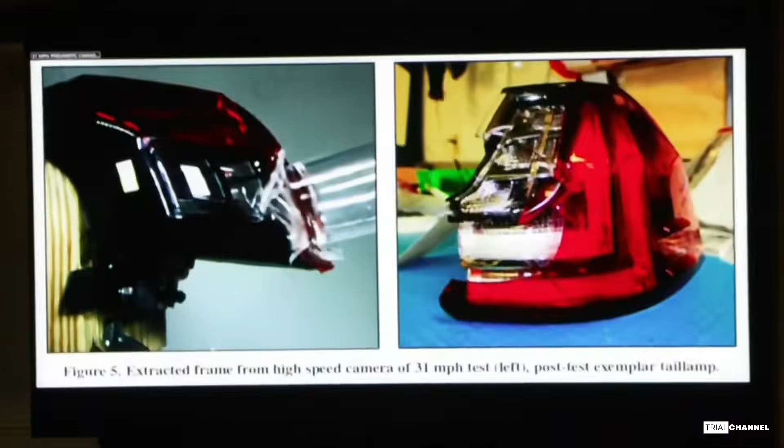Is this the photograph that was just marked as exhibit 213 that's in front of you? Yes. Can you explain to the jurors what they're looking at? So on the left part, you are looking at a frame from the high-speed video just after the contact with the taillight. On the right, you're looking at the post-damage to the taillight after the glass had been fired into it. And if we could look at the next exhibit with the court's permission.

Okay. And what are we looking at here? Same thing on the left. Again, this is the 37 mile an hour test. The glass striking just in the area where the bottom of the turn signal indicator is, so right where it meets the red portion of the lens and the clear portion of the lens, that's about where the impact point was.

You could see that a large portion of the outer red assembly, lens cover is missing and fractured. The clear portion of the outer lens to the turn signal indicator is also fractured, as well as the underlying clear diffusers in that assembly.

Would your testing in both of these scenarios, the 31-mile-an-hour test and the 37-mile-an-hour test, represent an accepted methodology for controlling for aim, velocity, impact site, and those issues, if you will, as it relates to testing of this sort? Yes, we were able to control those variables. And is that an accepted methodology in the area or the field of accident reconstruction?

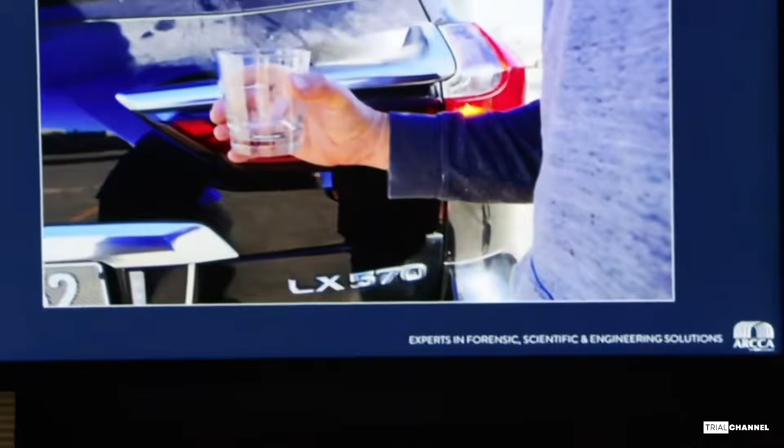Slide number 2, please. Based on your review of Dr. Welcher's reports and his data, what testing did Dr. Welcher undertake or conduct? So he did, initially it appeared that he did a static test, if you will, just demonstrating holding his right arm out adjacent to the rear taillights on the right side of an exemplar Lexus to demonstrate his theory of how the arm contacted the taillight.

What is a static test? I'm sustaining that. Ask it differently, Mr. Jackson. I'm going to strike that. What testing did you note that Dr. Welcher did with regard to this particular photograph? What is a static test? Well, in a static test, neither the arm or the vehicle is moving. It's just him aligning his right arm adjacent to show how his arm aligns to the geometry and the dimensions of the Lexus.

Did Dr. Welcher appear to be wearing similar clothing as John O'Keefe was wearing on January 29th, 2022? Yes. Was there any significance or purpose for that, in your opinion? In this test, no.

Did you identify any limitations with regard to this sort of testing undertaken by Dr. Welcher? Well, it's very basic in that the only thing that this demonstrates is that you can get your right arm to align with the taillight. Beyond that, it doesn't tell you anything with respect to what happens to the arm when it makes contact with the taillight. What's the motion of the arm? What's the damage to the taillight? What's the acceleration of the arm? What's the forces of the arm? So it doesn't answer any of those other questions. The only question it answers is, does the arm align with the taillight?

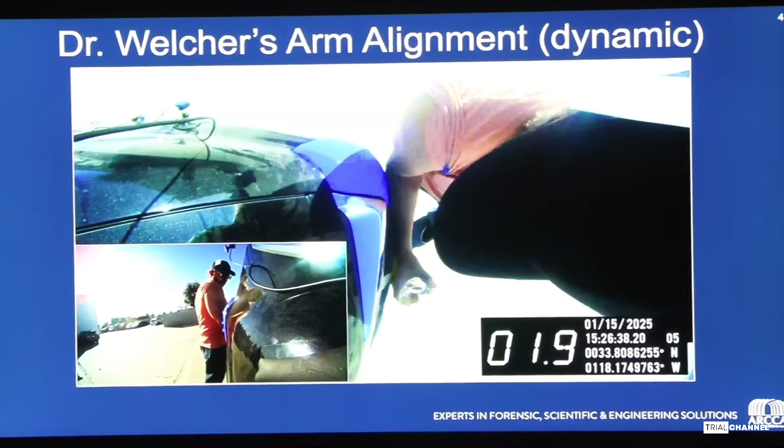Did you note any shortcomings with this particular test? Well, much like the static test, again, it leaves the door open to all those questions about doing this at 2 miles an hour. That doesn't tell you anything about what happens at 10, 15, or 20 miles an hour. What are the collision forces? What's the damage? How does the arm move? What would the expected injuries be? This dynamic test, as well as the static test, doesn't answer any of those questions for us.

Is this test from Dr. Welcher considered a force calculation? I'm not aware of him making any type of force calculations or measuring accelerations or anything of that nature, no.

Did Dr. Welcher conduct any testing to determine whether the damage to Miss Reed's Lexus was consistent with the striking of an arm of a pedestrian? I'm not aware of any impact testing that he did, no.

Did Dr. Welcher conduct any testing to determine the forces necessary to cause the damage to the taillight of Miss Reed's vehicle? Not that I'm aware of, no.

Did Dr. Welcher conduct any testing to determine the forces necessary to cause the injuries to John O'Keefe's arm? No, not that I'm aware of.

Did Dr. Welcher provide any opinions as it relates to the speed of the subject Lexus at the time of the alleged incident? No, from reviewing his report and his PowerPoint and analysis, I could not find anywhere in it a specified speed or even a range of speeds.

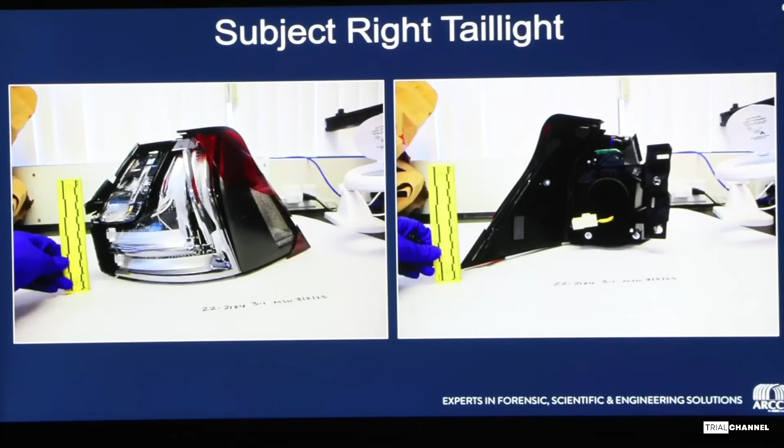Well, I'm going to jump to the next slide. So now the taillight has been removed from the vehicle. What's important here is looking at what damage we have to this taillight, what components were damaged in this alleged interaction. We're looking at the clear diffuser at the bottom, which is fractured and missing, same with the ones on the vertical side. The majority of the outer red lens is also missing and fractured. And on the back side, we also have some fracturing to that black plastic, and there's a chunk of plastic missing on the top portion of the taillight as well.

I want to ask you a couple of questions about that diffuser. If you could focus your attention on this area. Describe for the jurors what they're looking at in terms of the diffuser. What is the diffuser? Right, let me see if this...

So the diffusers, right where my mouse is, there's a clear diffuser that runs along the bottom, and then there's another diffuser that runs along here, and then it also goes up vertically. Same here on the bottom one, that also goes up vertically. So this piece was missing and fractured on the bottom, along with the vertical portion. The chrome piece here is also fractured and damaged, and then the second tier, that clear diffuser, was also fractured and broken on the upper section as well.

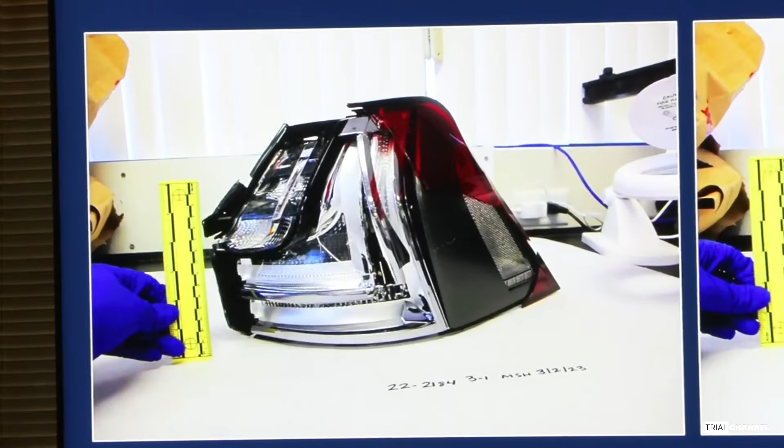Was that of significance to you in your review of the damage to the taillight? Yes. Why? Well, because that tells me that we have to have enough force and energy to break that 5 millimeter thick red outer lens we talked about earlier. We have to have enough force to get beyond that to now start penetrating into the interior components of the taillight to get to those clear diffusers and cause damage induced out the back end of the taillight as well.

May I have just a moment more? Yes.

Dr. Wolfe, did you bring with you an undamaged taillight exemplar? Yes, it's up here with me.

Describe what it is that you brought with you. I brought a two-part assembly. I 3D printed a bracket so that I could mount the liftgate taillight assembly as well as the quarter panel taillight assembly. These are undamaged, in manufacturing specs, correct? Correct, yes.

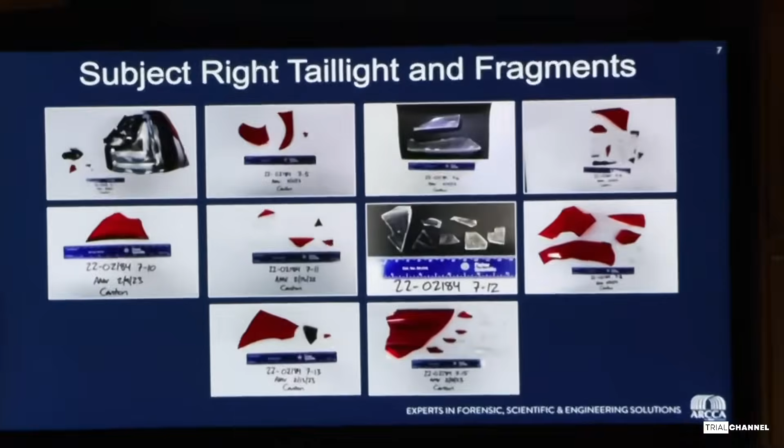What are we looking at here? This is a collection of photographs depicting various fragments from the right rear tail lamp assembly of the Lexus. I'll note there are a few glass fragments in this photograph, which, as discussed earlier, did not originate from the taillight assembly since there's no glass in it. But altogether, from what I recall, there were about 50 fragments counted, maybe a little less, from the right taillight.

If we could go to the next slide, please. What are we looking at here? These are photographs depicting the sweatshirt or hoodie that Mr. John O'Keefe was wearing on the night of the alleged incident. And what was the role that this played in your analysis ultimately?

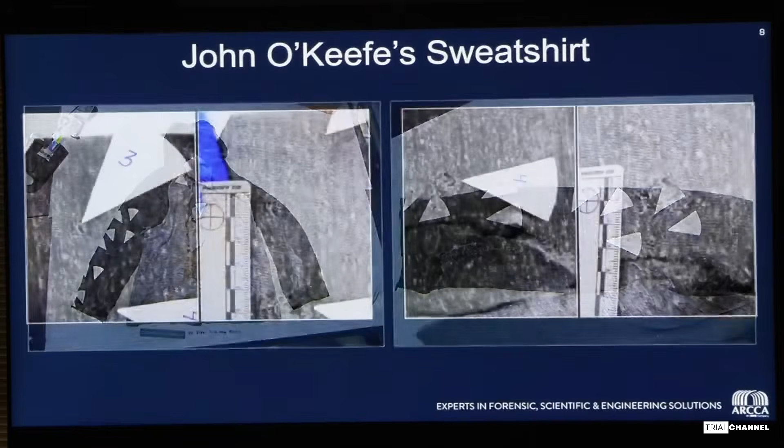Well, one of the things I noted, if we go to the next slide, is there were a series of small punctures or holes in the right sleeve of the sweatshirt, varying in size, some as small as just a few millimeters. I believe there were maybe 10 or 12 on the right sleeve.

If we could go back to the larger photo, do you see the right sleeve denoted on the photograph to the right? Yes. What was the significance of the triangular arrows or markers? I believe those were to annotate or draw attention to those holes, the defects in the right sleeve. Can you count those for us? On the photograph on the right, I believe I see a total of 9. And on the photograph on the left, just the right sleeve area? 9 as well.

If we can go to the next slide. What are the arrows pointing to in these photographs? This is basically the previous shot, but close-ups of some of those evidence markers. You indicated some of the sizes - what were some of the smaller sizes of those holes? From what I recall, around 3 to 5 millimeters for some of the smaller ones. How big is 3 millimeters in inches? Probably around an eighth of an inch or so.

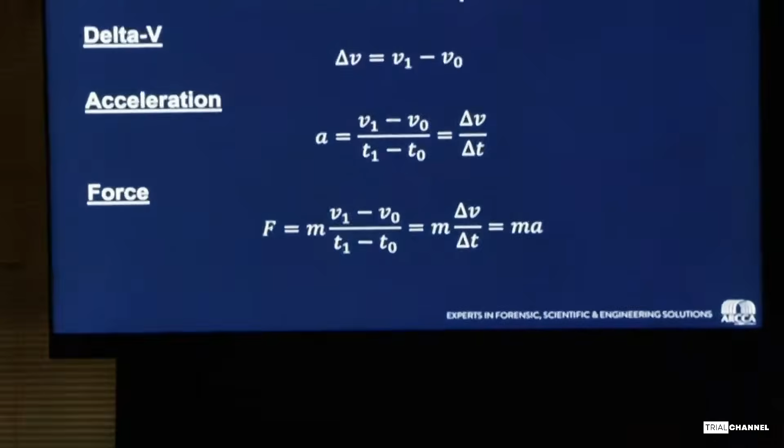So that first one, delta V. What do I mean by that? That simply means you could think of delta as change in. So change in velocity. If you look at that equation, the change in velocity is really simple. If I've got an object that's initially at rest, V naught is 0 miles per hour, I hit it and it's now moving 10 miles per hour, that means it underwent a change in speed of 10 miles an hour and is moving at that velocity.

Acceleration is essentially how quickly did that velocity change occur. Did it go from 0 to 10 miles an hour in a split second, or did it happen over a few seconds? Depending on the timing of how quickly that change in velocity occurred will determine what the acceleration is. And as I've already mentioned with Newton's second law, we can take that acceleration information and apply it, if we have a known mass, to calculate the force on that object.

How did these math equations, delta V, acceleration, force, play into the accident reconstruction in this case? Well, they're extremely fundamental, and I think as we go through the PowerPoint you'll have an appreciation and understanding of what these concepts are.

You'll see that I've plotted graphs with acceleration that show the rate of change in speed over time. You'll see graphs of delta V, the change in speed of the arm as it's being impacted by the taillight. And then ultimately we can calculate the force of that impact to assess whether or not there's a mechanism for the injuries, which my colleague Dr. Wolfe will discuss.

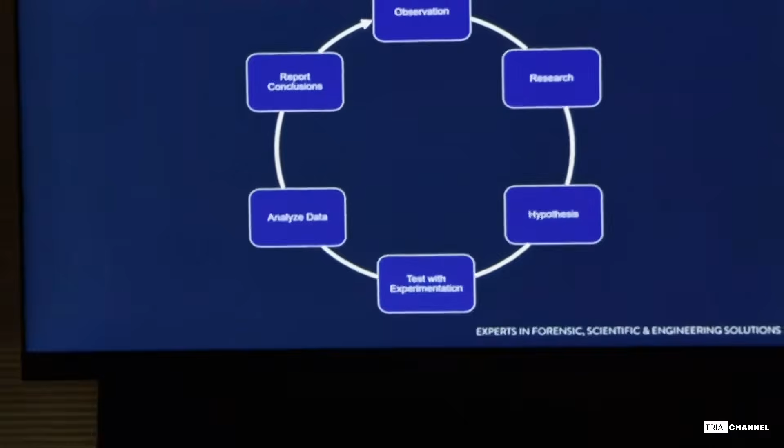What are we looking at here? Scientific method. What does that mean? So the scientific method is a process that scientists typically use to be able to reach conclusions. And so you can think about it in this case, we make an observation, right? We have injuries to the arm. We've got a damaged taillight. So let's try to do some research to figure out, has anyone done testing with that? Has anyone hit an arm with a taillight, see what happens, see what the forces are?

And then we start to make a hypothesis, right? It's kind of an if-then statement. If the arm contacts the taillight, does the taillight break? Does it not break? What's the hypothesis there? And at least my understanding of reviewing Dr. Welcher's work, it appeared to be that his hypothesis... Sustained. Next question. Sure. Let me ask a different question.

Going back to the calculations previously, the delta V, the acceleration, the force calculations that you described to the jury, did you see anywhere in any of Dr. Welcher's reports or his data that he undertook those core calculations? No. With regard to the scientific method, did you see whether or not Dr. Welcher followed this scientific method as you're explaining it to the jury?

Sustained. What opinions or conclusions did you come to about the scientific method, if any, that Dr. Welcher did or did not undertake? Sustained. Did you review Dr. Welcher's entire database? In other words, all the reports, all the raw data, and his PowerPoint? Yes. Did he undertake the scientific method as you know it? Right, so that's sustained.

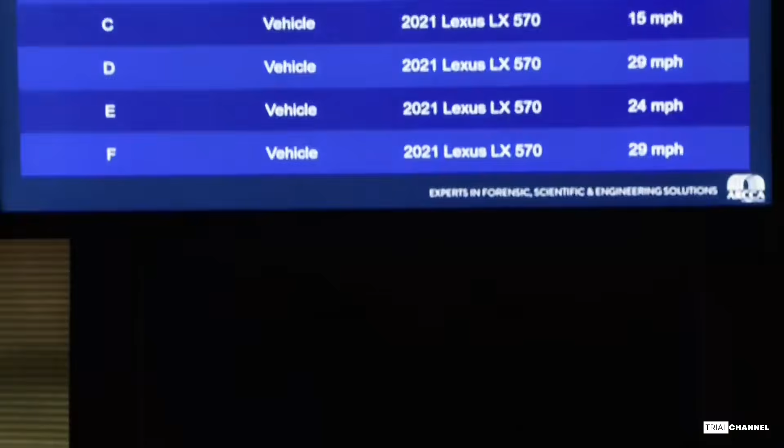Let's move on to the next slide. Did you actually undertake testing in furtherance of the scientific method? Yes. Let's move on to the next slide and you can describe what we're talking about. What are we looking at here? So you're looking at a test matrix of the various tests that we conducted at ARCCA. I could go through them one by one if you want. Let me ask you foundationally, was your testing directed toward determining whether or not the scenario proposed in Dr. Welcher's report was consistent or inconsistent with what you would find, ultimately? The objection sustained. Was your testing specifically designed to determine whether the damage to Miss Reed's vehicle, her Lexus, was consistent with the scenario that was proposed by Dr. Welcher? Yes. That's sustained too. Ask it differently, Mr. Jackson.

What was your testing? What were you trying to find out? Well, again, we talked about earlier about that hypothesis, right? My understanding, Dr. Welcher indicated that the arm contacted the taillight, but there was no analysis or testing to determine what's the expected outcome of that. What's the damage to the taillight? So you answered the first question. I'm striking that second part. Ask another question. Was there anything else? Simply put, it's to find out what happens when you impact an arm with a Lexus taillight at various speeds. What happens? What was your understanding of Dr. Welcher's hypothesis? That's sustained. Did you have an understanding of Dr. Welcher's hypothesis? That's sustained too.

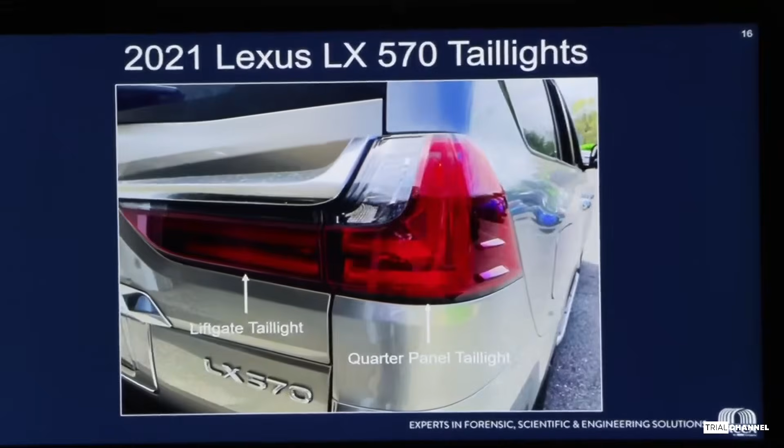And ultimately, what testing did you undertake specifically as it relates to this particular vehicle? We did full-scale vehicle testing with the vehicle driving into an ATD arm, as well as an ATD arm attached to a dummy, and then a full-on impact to a test dummy. Did you assess the damage to the right tail light after these various tests? Yes, after all of the tests. Did you assess the acceleration and quantify the forces that were involved? Yes. Did you assess the material and textile damage to the clothed ATD? Yes. Ultimately, did you conduct lab tests in an effort to answer some of these questions as well? Yes.

And you've already mentioned this, but you utilized in your testing the exemplar vehicle to the fullest extent that you felt necessary? Absolutely, yes. Were you hampered or hindered in any way in terms of damaging the vehicle or utilizing the vehicle in any way that you wished? No. Let's go to the next slide, please.

What are tests A and B? What are those laboratory tests? So these were the initial two tests that we did to get an idea of starting to test this hypothesis. As I mentioned, we weren't sure at 10 miles an hour what would happen to the taillight. We wanted to see what would happen at 17 miles an hour with the arm. So again, it was to evaluate from a starting point what happens in this interaction based upon how Dr. Welcher had his arm oriented in his PowerPoint and analysis. Next slide, please.

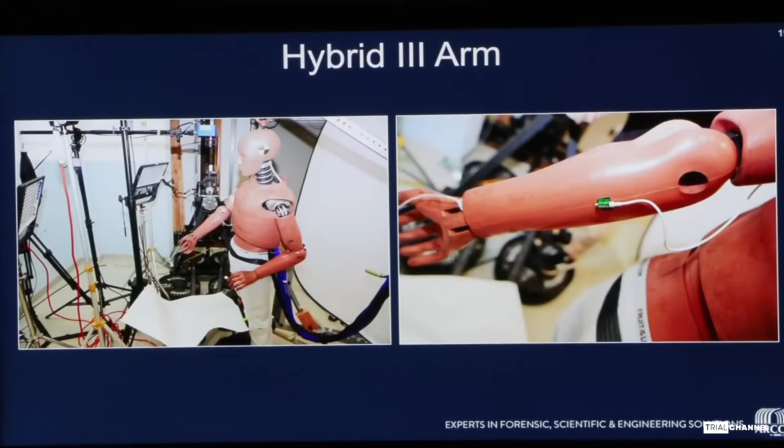Does that accelerometer put into motion some of the mathematical formulations that you talked about earlier? Yes. Let's move to the next slide, please.

Tell me about these photographs. The importance of this, more specifically looking at the right photograph here, might be a little hard to see, but we wanted to get the same exact sweatshirt or hoodie for the testing to evaluate if the taillight breaks, is there a mechanism for the fragments to penetrate and cause holes in the sweatshirt as were observed in Mr. John O'Keefe's sweatshirt?

Next slide. Were you successful in finding the exact replica sweatshirt? Yes, and I will note, as I mentioned, the material blend on the sleeves is the exact same. They are 60% cotton and 40% polyester. Was it important in your mind to maintain consistency with the data you had received concerning John O'Keefe's clothing? Certainly, I think we wanted to try to control as many variables as we could. Let's move to the next slide, please.

Test A. Describe Test A for us, please. You're going to see a series of photographs and then videos, but Test A was mounting a preconditioned taillight on that linear impactor to accelerate it into the Hybrid 3 arm to, again, evaluate the damage to the taillight and the acceleration to the arm. Let's move to the next slide, please.

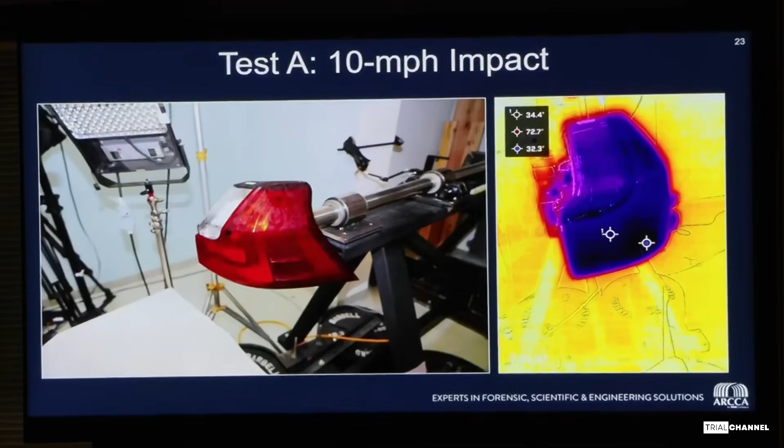How did you get that exemplar taillight down to around freezing? All of the taillights that we tested were preconditioned overnight in a freezer. Why was that important? It's my understanding that at the time this allegedly occurred, the ambient temperature was 31 degrees Fahrenheit. As I mentioned earlier, there's a correlation between how plastics perform in cold weather, so we wanted to take that variable into account in our testing, preconditioning them to temperatures consistent with the time of the alleged incident.

Next slide, please. What are we looking at in this photograph? This is a video. Do you want me to go ahead and play the video? Tell us what we're about to see, and then I'll ask the court's permission.

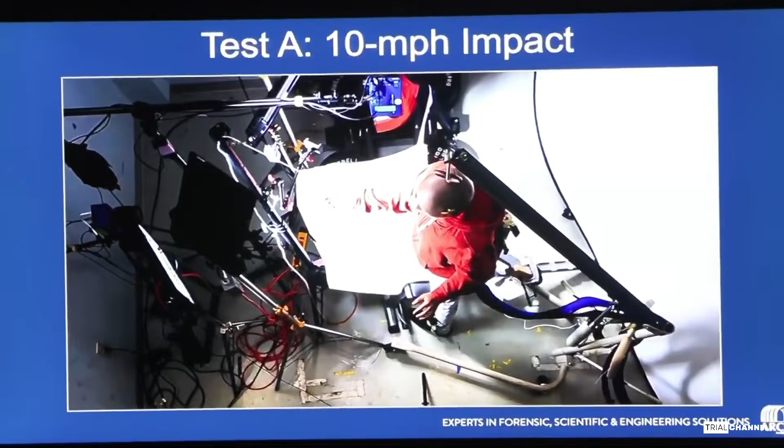You're looking at a camera mounted above the entire setup. If you look at the top portion of this video, you will see the taillight, part of it covered by the high-speed camera. What will happen is the linear impactor will fire, and the taillight will be accelerated up to 10 miles per hour, striking the clothed ATD arm. With the court's permission, let's go ahead and play the video.

Next slide, please. What is this? This is also a video, but with the high-speed camera looking top down at the arm. You will see the taillight enter from the left and contact the arm. I will note that this is essentially slow motion, so it's not happening in real time. You'll see the taillight slowly moving, but it's actually moving at 10 miles per hour. Understood. Go ahead and play that.

Can I ask a question now that that's played? How did you mount the taillight to the accelerator, that linear accelerator?

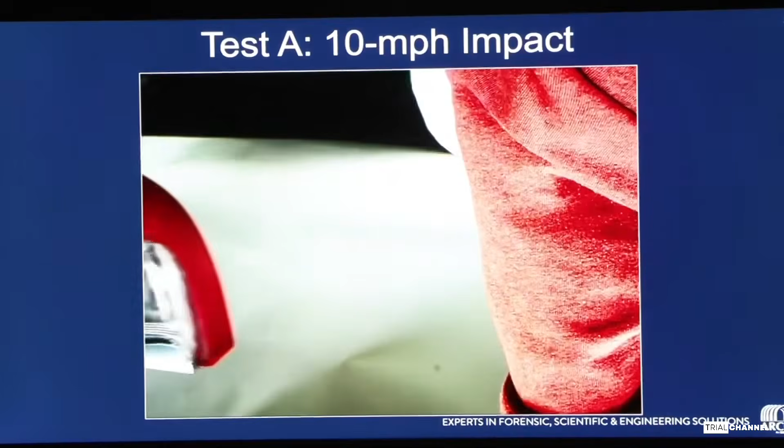We had to get a little bit creative there, as you may have observed when we had the physical assembly out earlier. The back of that isn't some nice clean surface we can just bolt onto. So what we had to do is 3D print a bracket that we could bolt onto the linear impactor, and we used polyurethane expanding foam to marry those two together.

Did you see any debris from that foam mounting mechanism? Yes, there's a few flakes of that polyurethane foam off the backside being dispersed. With regard to this particular 10-mile-an-hour test, what did you note in terms of damage to the taillight? It was very minimal. And any damage to the hoodie? There was none.

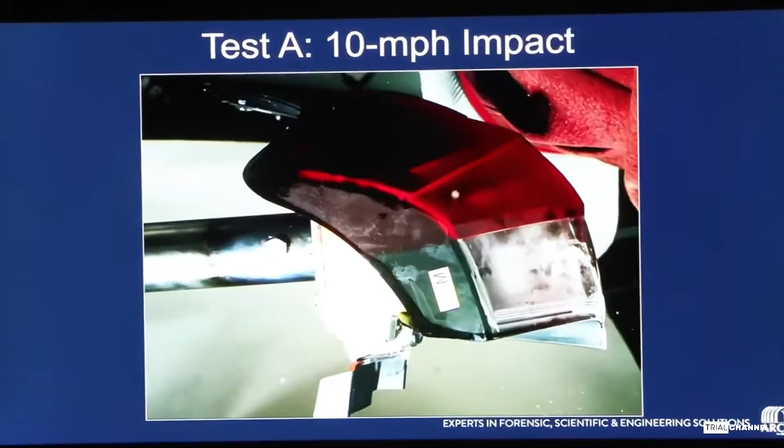Can we go to the next slide, please? What are we looking at in this slide? So this is looking at a side view, same test, just from the side. Similarly, you'll see the taillight come from the left and impact the arm. If we can play this, please.

What did you note in terms of deflection of the test arm? Well, the arm essentially, and we'll see this in the data later, reaches a common velocity with the taillight. Based on the portion of the arm that was contacted, consistent with how Dr. Welcher has it oriented, it becomes accelerated up to 10 miles an hour roughly.

Over approximately what period of time is that arm accelerated up to 10 miles an hour along with the taillight? We'll see it on the data plots. I think it's about 10 milliseconds or so.

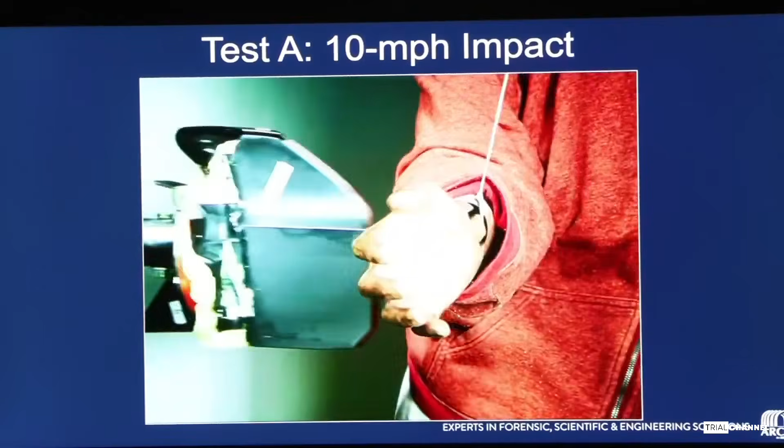Do you know how long an eye blink on average takes? Off the top of my head, no, I don't. Probably pretty quick, somewhere around 250 milliseconds? Does that sound right, sustained?

Let's move to the next slide, please. What are we looking at in this series of photographs? These are extracted frames from the high-speed video we just saw on the previous slide, showing at contact, just after contact, and then post-contact, so you can see the kinematics of the arm and how it's moving.

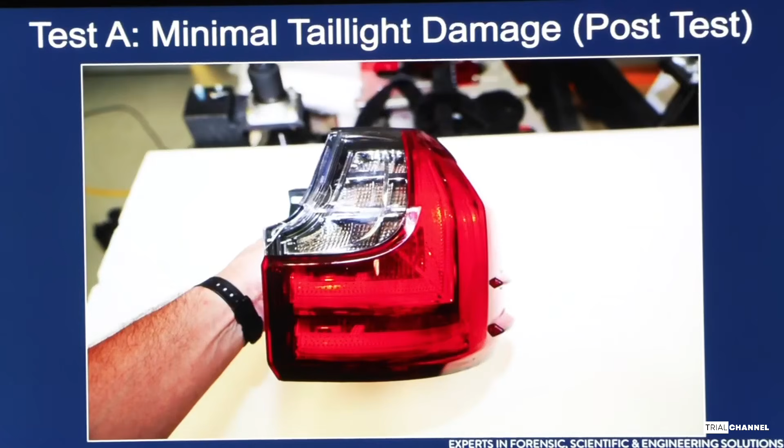How would you describe the damage to the taillight in the 10-mile-an-hour test? If I may go to the next slide, I think it might help. So this was the totality of that damage at 10 miles per hour. I would describe it as minimal and superficial. Next slide, please.

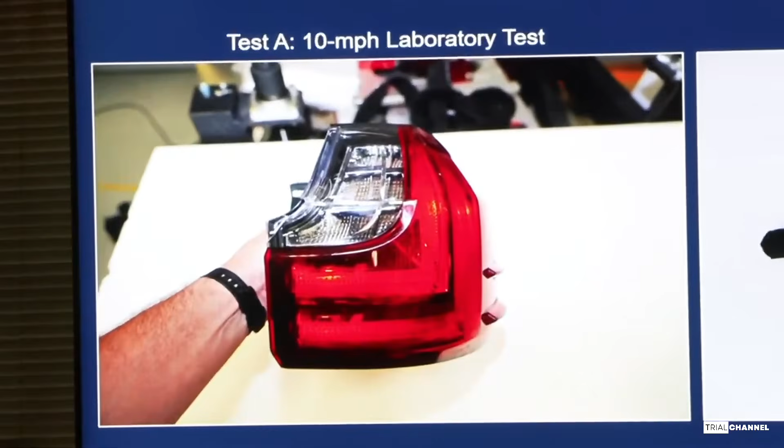What is this? This is the photograph I just showed you compared to that of the subject taillight, so you can have a side-by-side comparison of the test taillight to that of the subject. Were you able to reach any opinions about whether the damage to the subject taillight is consistent with striking an arm at 10 miles an hour? It's inconsistent, in my opinion.

Next slide, please. This is still test A, is that correct? Correct. Were you able to reach any opinions as to whether the damage to Mr. O'Keefe's clothing is consistent with being struck by the taillight at 10 miles per hour? What I observed from the test is that there was no mechanism to create any of the holes we observed on the subject sweatshirt.

Do you hold that opinion to a reasonable degree of scientific certainty, as well as the former opinion you just gave? Yes. Next slide, please.

What are we looking at in this graph? This is a graph that shows—on the next graph you're going to see a 24 millisecond window, but what I want to show here is what this looks like over a full second, so you can appreciate just how quickly this is occurring. As you mentioned earlier about a blink of an eye, this is even shorter than that. We're looking at, as you'll see on the next graph, something spanning just a few milliseconds.

So that yellow tick that you see in the middle there, what I've done is I've plotted that over a full second. So 1 second is equal to 1,000 milliseconds. So if we go 500 milliseconds to the right, 500 milliseconds to the left, this whole graph represents 1 second in time. This impact duration is occurring very quickly.

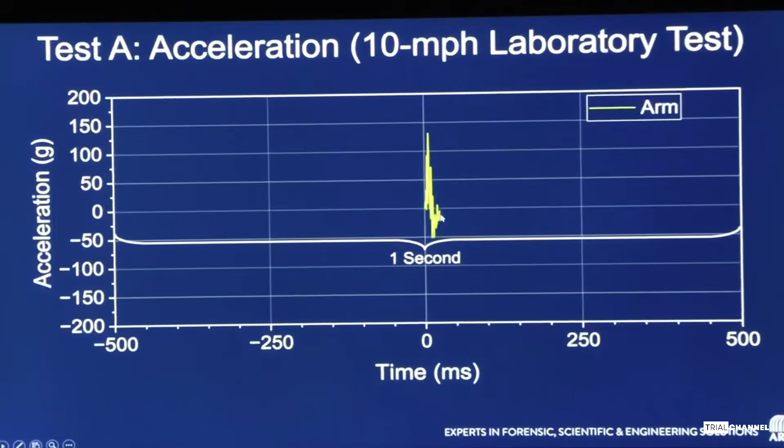1 second, is that reflected from the beginning of the graph to the end of the graph? That's representative of 1 second, is that right? Correct. So starting at this y-axis all the way to here is 1 second in time, with our impact duration happening over just a few milliseconds. And this was at 10 miles an hour? Yes. Next slide, please.

What are we looking at in this graph? So we're looking at the acceleration, or the change in speed over time, that parameter we discussed earlier. So what you can see is that as the arm is impacted, we have the accelerometer mounted on the inside portion of the forearm, if you will. You see that it starts to accelerate, right? Because it's changing its speed, and then it starts to level off after the impact has subsided, basically, and it's reached a common velocity.

What do we see in terms of the G-forces that the arm is subject to? So the peak is occurring right around here at about, looks like just over 6 milliseconds. And the peak acceleration is just over 130 Gs. And what does that mean? What is a G? So a G is acceleration due to gravity. So if we're being held down by 1 G, you could think of it as basically a multiplication factor, that it's 131 times the acceleration due to gravity.

What are we looking at in this slide? So this is, again, that concept we talked about earlier, delta V. This is the change in speed. So if we do some math to the previous data that we collected, it's a technique called integration, where we can actually add up all of that acceleration to determine what speed the arm got up to.

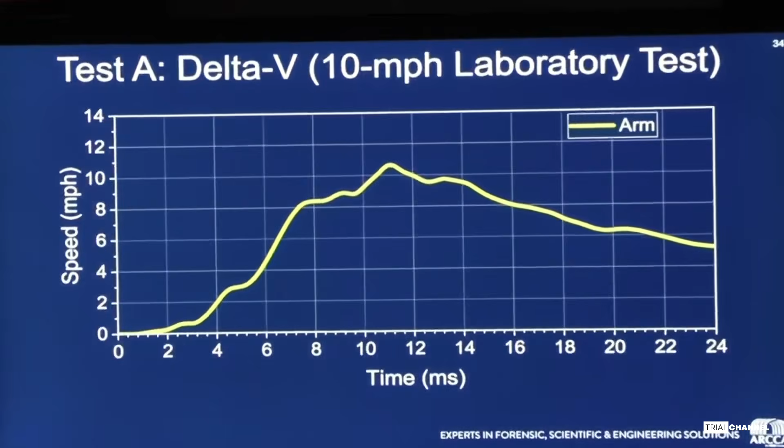Dr. Wolfe, before we get into laboratory test B, I failed to ask you, were you compensated or was ARCCA paid following the proceeding last year for any of the time? Yes, last year. Correct. Do you know how much that was? From what I recall, I think it was around $20,000.

Was ARCCA paid by the defense for your initial testing, the initial analysis we talked about earlier this morning? Was ARCCA paid by the defense for any of that? No, not the report, testing, none of that. Okay. What were you paid for last year related to the first proceeding? My time to appear at the proceeding. Travel? Correct, travel. Testimony. Yes, sir.

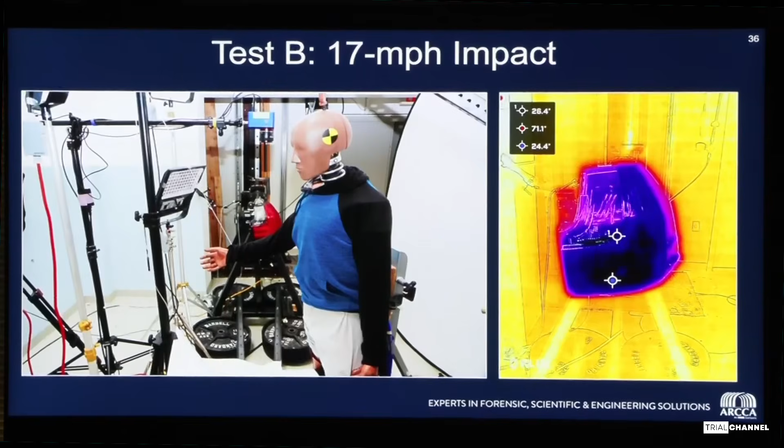And the ATD, the test dummy, if you will, is it also clothed? Correct, yes. You may notice a difference in the sweatshirt color. We put on a new sweatshirt in this test. Was it also an exact replica of the sweatshirt at issue worn by John O'Keefe?

I'll ask it a different way. How did it compare to the sweatshirt that was worn by John O'Keefe? It was made by the same company and had the same material blend as the previous test and the one that Mr. John O'Keefe was wearing. Next slide, please.

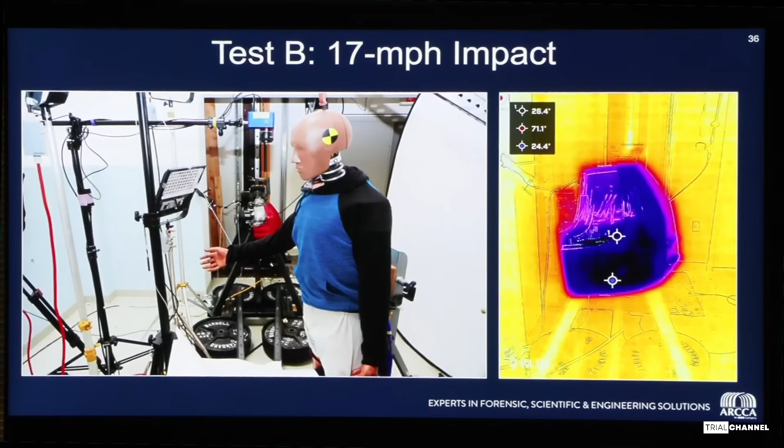What are we looking at here? This will be a video that you will see, much like you did in the other one, where the taillight will be accelerated up to 17 miles an hour, impact the arm. And one of the things you'll see is actually an artifact of the test, where the taillight, due to the fact that the impactor stops at the end of the stroke, that force actually causes it to decouple from the polyurethane foam that we use to adhere the two.

What do you mean by decouple? So, as I mentioned, once the linear impactor reaches the end of its stroke, it stops instantaneously, and the force of that stop, where we adhered the two together, just caused it to detach, basically break away. So in essence it doesn't matter, because we only care about that short duration of time, that 10 milliseconds. So once it breaks, it's already reached a common velocity to the taillight. Okay, can we go ahead and go to the next slide, please?

What do you note about this impact? One of the things you'll see is kind of that dust cloud that you see. Again, that's all the particulates from the expanding foam that we use. So that's kind of what you see in the background there, going over the arm and the taillight. Do you note more damage or less damage to the taillight at 17 miles an hour versus the 10 mile an hour test? There is more damage, yes. Let's go to the next slide, please.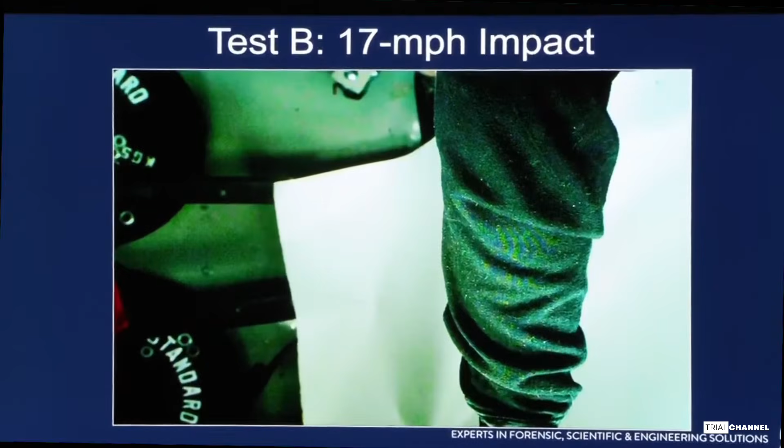Can you describe the decoupling that's shown here? Absolutely. As you can see, where the two are basically married together, it's kind of actually coming back together now. So that bond that we had, this is the most effective way that we could mount it to the impactor. It just became detached due to the force of that impactor stopping at the end of the stroke. Understood. Next slide, please.

What are we looking at here? In this slide, you're looking at another high-speed video. This is just a side view. Again, you're going to see the taillight enter the frame from the left, impacting the arm at 17 miles per hour. Is this in slow motion as well? This is in slow motion, correct, not real time. Okay.

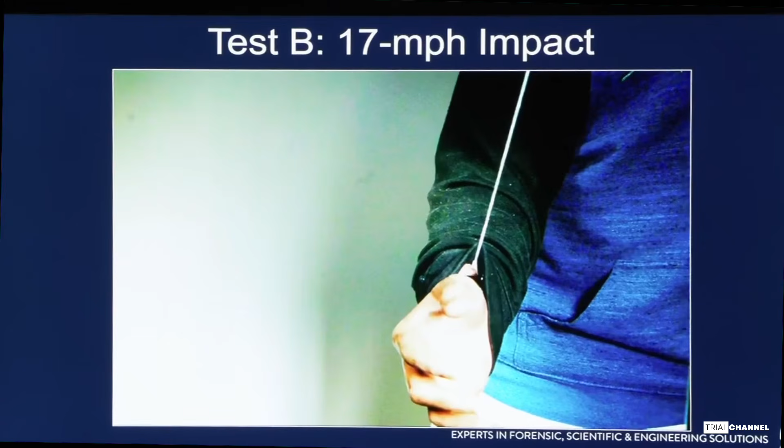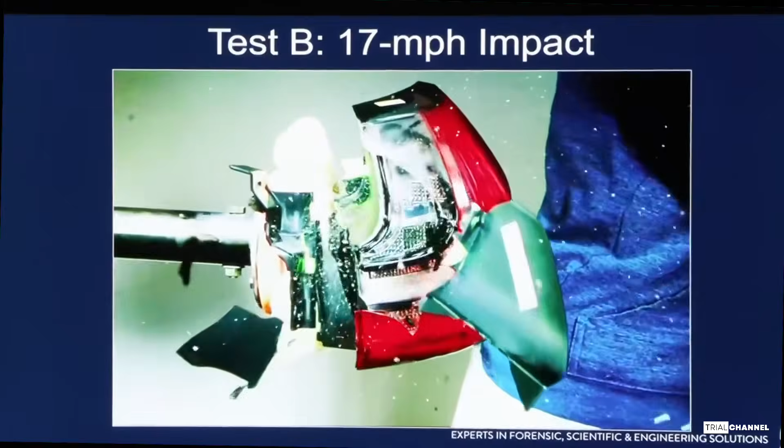What do you note in terms of the deflection on the arm? The arm, as we saw in the previous one, is accelerated up, so it's moving now at roughly a common velocity with what the impact speed was. And what did you note about the damage to the taillight? It was more significant than the 10-mile-an-hour test, which had very minimal damage, where several fragments of the red outer lens fractured as well as the clear lens. Okay, next slide.

And what is this depicting? This is extracted frames from the previous video, just showing right at contact, during contact, and post-contact. Next slide, please.

What is this a photograph of? This photograph is depicting the damage to the taillight at the conclusion of the test, where it's missing fragments of the outer red lens. I will note that the interior diffusers and plastic components are intact in this test.

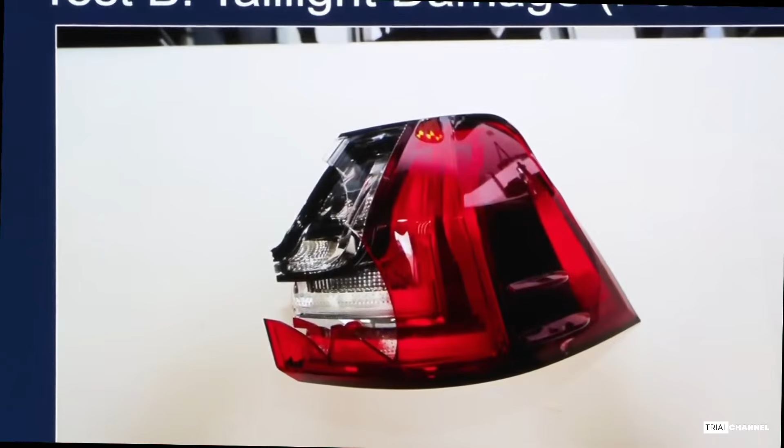When you say intact, what do you mean? They are not damaged or broken. At all? Correct, at all. Next slide, please.

What is that a picture of? Another photograph showing the taillight post-test. Again, no damage to the underlying diffusers in terms of being cracked, shattered, or broken. And what did you note in terms of the damage to the outer acrylic, the red piece? It broke into a few fragments, and I think on the next slide I depict those in a photograph. Let's take a look at that.

What is that? This is a photograph depicting the collection of the fragments post-test. I will note there's one clear piece, one red piece, another clear piece, and there is one more red piece in this bag. So the outer lens broke into approximately 4 pieces in the 17-mile-per-hour test.

And I'll point out one other thing just because you can see it in the photograph. This is the 3D printed bracket that we used to bolt it onto the linear impactor, with the foam on the other side that mounted it to the taillight. Thank you for that. Next slide, please.

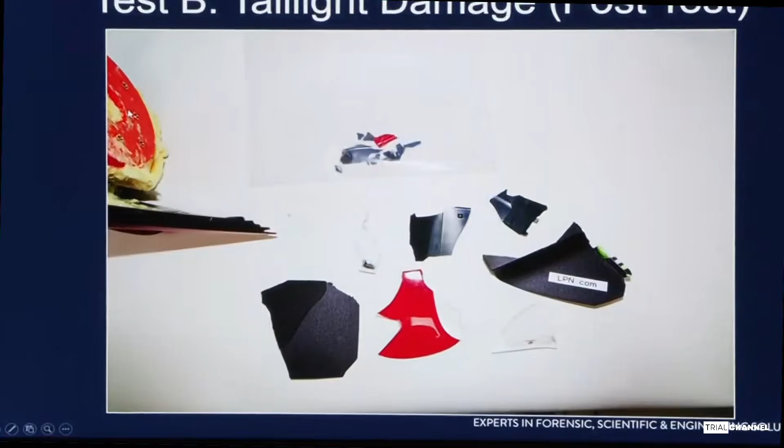What is this a picture of, or pictures of? This is a side-by-side comparison showing a depiction of the 17-mile-an-hour test impact to the test taillight, comparing it to that of the subject taillight. Were you able to reach any conclusions or opinions as to whether or not the damage to the subject taillight on the right is consistent with striking an arm at 17 miles per hour? It's inconsistent from a damage perspective.

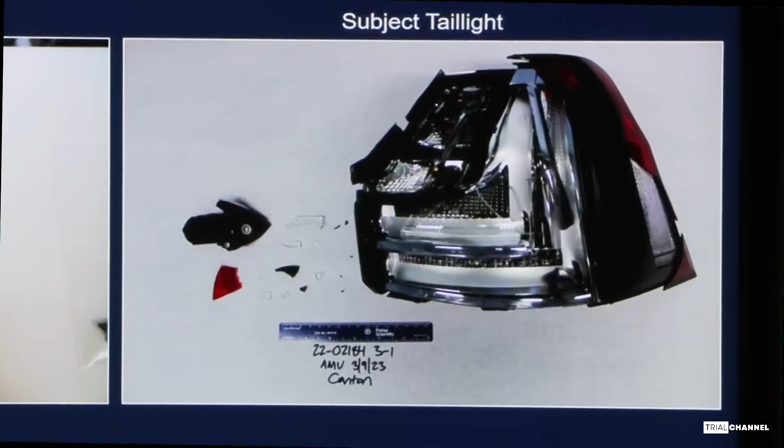What's the basis of that opinion? The test that I've just showed you all. Is that testing conducted in accordance with the scientific literature and generally accepted methodologies that you've earlier described? Yes. Is the damage to the right rear taillight consistent with striking John O'Keefe's arm at 17 miles per hour? No. Do you hold that opinion to a reasonable degree of scientific certainty? Yes. Slide 45, please.

What is this? You're looking at photographs post-test of the sweatshirt that the ATD was wearing at the time of the impact. Is this the 17-mile-an-hour impact? Correct, yes. Did you note any defects in the fabric of the right arm? There were no punctures, holes, or fraying of the material during this impact test.

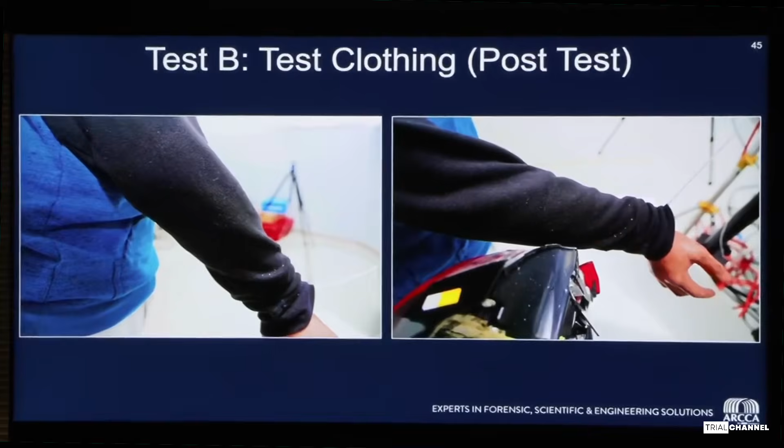Based on this testing that you conducted in this case, is the damage that you saw of the shirt that John O'Keefe was wearing consistent or inconsistent with the shirt on the ATD? It was inconsistent compared to the sweatshirt that Mr. O'Keefe was wearing. Based on that, do you have an opinion as to whether the damage on Mr. O'Keefe's clothing was consistent with being struck by the right rear taillight at 17 miles per hour? It is inconsistent. Next slide, please.

Did that have any significance on your analysis? Yes. What was that? Well, we can use that to estimate. Obviously, we can integrate that to get the speed, but we can also estimate the force applied to the taillight with that information. Can we go to the next slide, please?

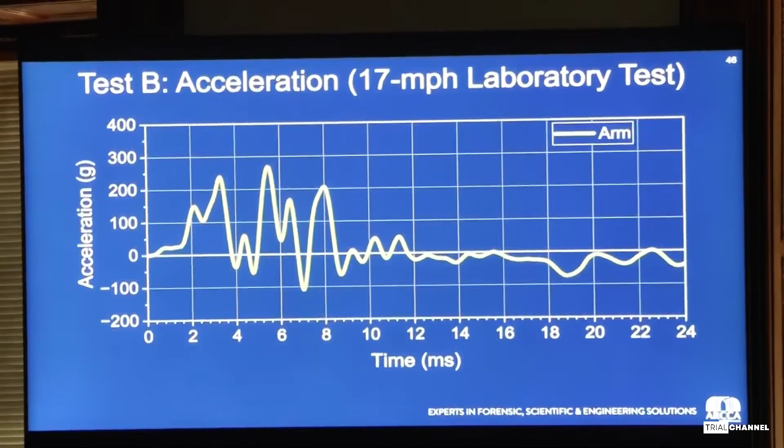What is the delta V as it relates to the 17-mile-an-hour lab test? So you can see, again, the arm initially at rest is accelerated up, increasing in speed, and then reaches just about 16 miles per hour, so reaching nearly a common velocity with the taillight at about 8 milliseconds in time. Next slide, please.

Did you conduct additional tests other than the 2 lab tests we've talked about? Yes, sir. Describe in general, and then we'll talk specifics. What were the tests you undertook after the lab tests? So we conducted 2 tests with a suspended ATD arm that was impacted by an exemplar 2021 Lexus LX570. We then conducted a test where the arm was attached to a test dummy, and our final test was a full-on impact to a test dummy. Can we go to slide 48, please?

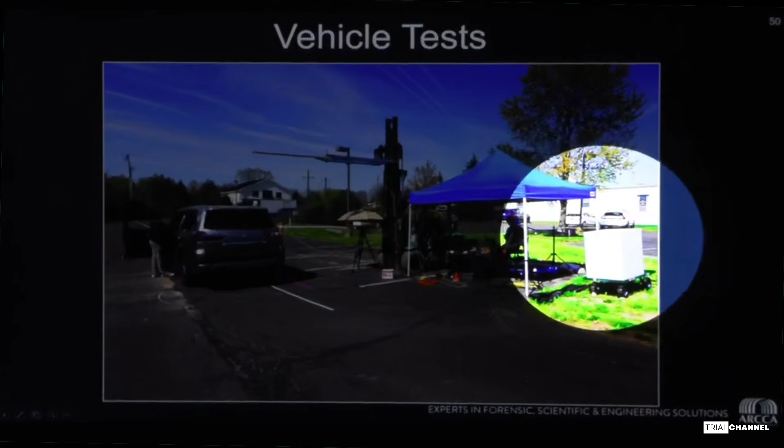We have our high-speed cameras set up under this umbrella. There's another one over here. Another thing you'll note is we brought out the chest freezer when we were installing these in the Lexus to, again, keep them at that steady state temperature for as long as possible. If we could go to the next slide, please.

It was based upon my review of Dr. Welcher's work, and that he did through his static and dynamic test or paint test that this is how the arm was roughly oriented when the alleged contact occurred. What were you trying to replicate in positioning the arm this way, as it relates to the SUV?

Well, as I stated earlier, it was to understand, okay, let's get beyond just simple geometry, aligning things. What happens to the arm? What are the accelerations? What's the damage? We want to answer some of those other questions that Dr. Welcher didn't answer. I'm going to strike the last part of that answer. Does this configuration align with your understanding of Dr. Welcher's alignment of the arm as it relates to the vehicle?

Yeah. Objection. May we approach, Your Honor? Yes. Thank you, Your Honor. May I inquire? Yes. Okay, let's go to the next slide.

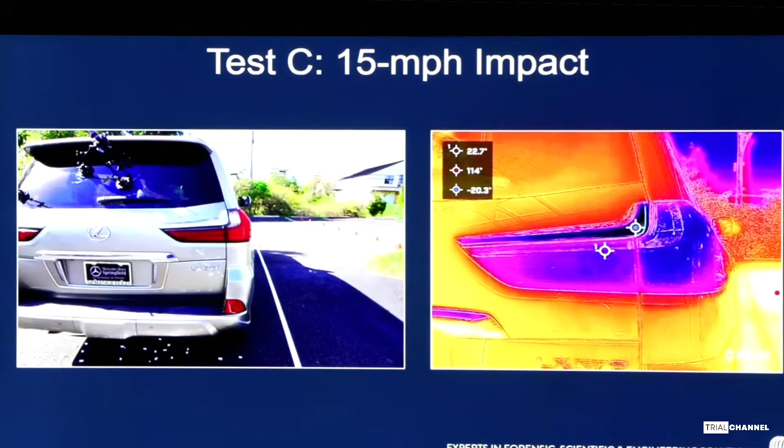And if I may just point out with the temperature. One of the things you may see here is that due to the reflective chrome here, this is just an artifact of that being really reflective. When we look at the average temperature profile of the taillight for this test, the average was approximately 17 degrees Fahrenheit. Was it important in this testing to account for the temperature variance of the taillight assembly? Yes, absolutely. And we certainly strive to maintain that.

One of the things you may see in this photograph on the left are these pellets on the ground, and that is due to the fact during the installation process, one of my colleagues was positioned adjacent to the taillight fixtures, applying a compress of dry ice to help mitigate any heat transfer during the install process. Let's move on to the next slide.

What are we looking at in this overhead view? It's a drone video, so you're going to see the Lexus accelerate from left to right, impacting the hybrid suspended arm in the area where you could see the umbrella. Can you use your spotlight and orient us? Where are the vehicles and the testing locations? Yes. The Lexus is starting here. You will see it accelerate in reverse with the hybrid arm suspended in this area here.

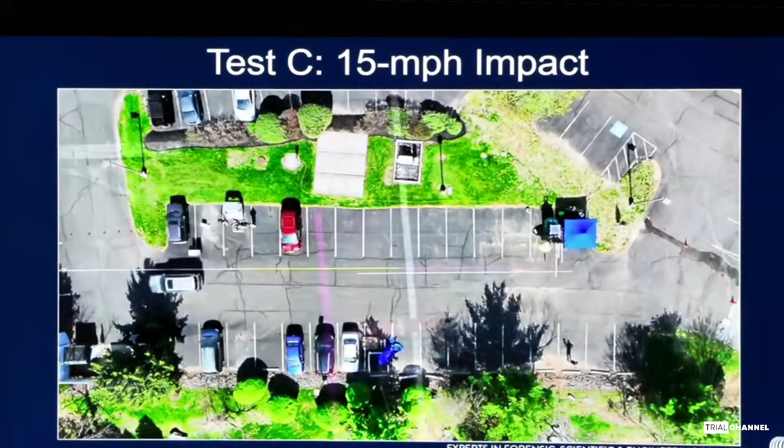Is this a video or just a still shot? This is a drone video. Let's go ahead and play that. Dr. Wolfe, is that in real time or slowed down, sped up? This is in real time. Okay. Next video, please. What is this? This is a camera that was mounted on top of the forklift that was suspending the arm.

Is this a still shot or is it a video? It's a video. What is the orientation of that arm as it relates to the vehicle that we'll see? It will make contact with the taillight, although I will note in this test, ultimately the contact ended up being more of a clip or a side swipe. Go ahead.

Did you see the impact area? It's quick. Right. What did you mean when you said more of a side swipe or a clip? So I think the next couple of videos will help demonstrate that. Let's move on to the next one.

What are we looking at in this video? I'm sorry, in this photograph. So this is going to be a high speed or a slow-mo video. You're going to see the Lexus come in from the right and then move across the screen to the left, and you'll see contact occur between the taillight and the arm. Okay.

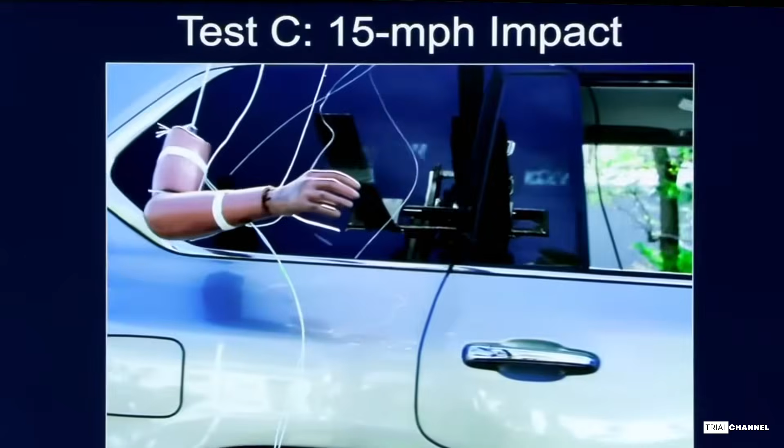Can you explain for the jurors using this video what you meant by more of a side swipe or a clip? Right. So this is where the hand and the wrist are kind of in the area of the quarter panel taillight, and then a portion of the forearm in contact with, what I previously said, the wrist and the hand in contact with the lift gate portion of the taillight, and then the forearm is more in contact with the quarter panel taillight. Okay. Can we move to the next slide?

And what is this angle? This is the same test, just a different angle with the high-speed cameras in slow motion. And this is at 15 miles per hour, correct? 15 miles an hour, correct. Can you explain for the jurors, given the fact that this is suspended, does that have any impact on the ultimate analysis or reconstruction, rather than being attached to an ATD? Effectively, mass is mass.

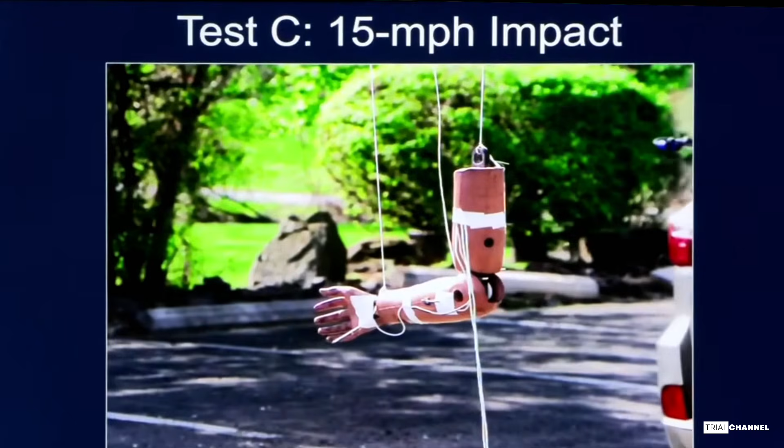So whether we have an arm that is suspended or attached, again, the arm is on a joint, right? So the arm can accelerate freely of the rest of the body, right? So if anything, even if it is attached to the body, there may actually be some additional force associated with that, just because there could be more mass attached to it. Understood. Okay, let's go ahead and play this video. Can we go to the next slide, please?

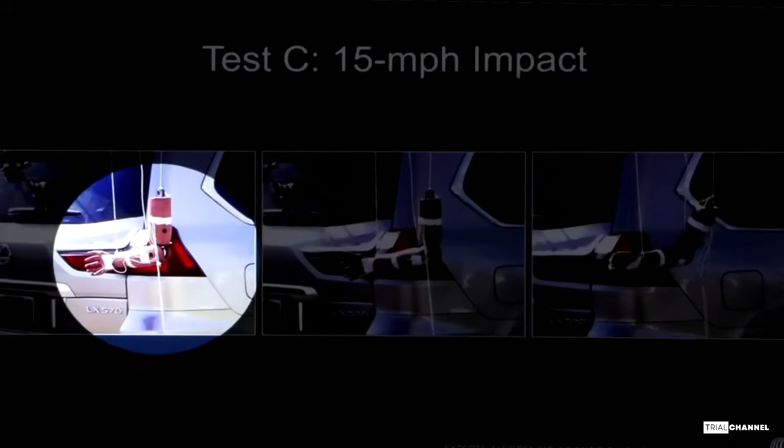What are we looking at in these three photographs? So you're looking at, starting from left to right, just at contact, and then just after contact, and then post contact. So as I mentioned, you can see that in this first one at contact, the hand and the arm aren't positioned as far out as in the previous test, and the hand and the wrist are in the area of the lift gate taillight with part of the forearm in contact with the quarter panel taillight. And as you saw in the video, essentially the arm just kind of moves out of the way of the vehicle as it comes by.

Describe the orientation of the arm in this particular test that you said was more of a side swipe. What was the orientation of the arm to the taillight in terms of how much of the arm touched the taillight? It's probably a clunky question, but I think you understand it. I don't know if I could break it down, I think just qualitatively speaking, like I said, it appears to be the hand and the wrist and kind of the lower portion of the forearm, maybe to the mid forearm or so. So nothing on the upper arm making contact? Correct, nothing on the upper arm, yes. Okay. If we can move past this slide and onto the next slide.

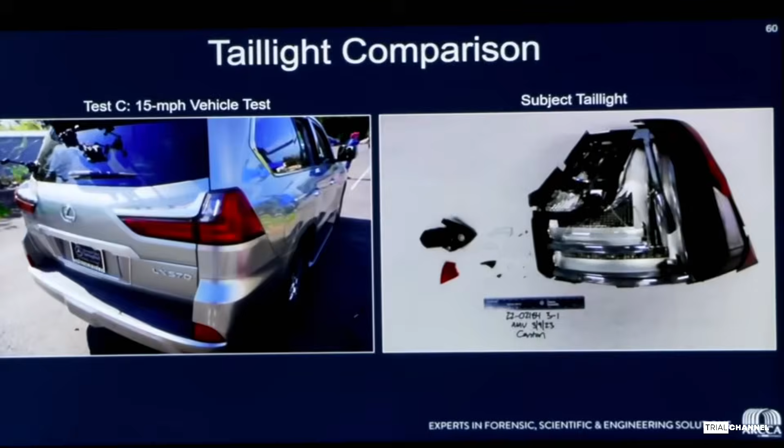Was that testing that we just saw done in accordance with scientific literature and generally accepted methodologies in the area of accident reconstruction? Yes. Is the damage to the right rear taillight of the subject vehicle consistent with striking John O'Keefe's arm at 15 miles per hour in a side swipe configuration? It's inconsistent. Do you hold that opinion to a reasonable degree of scientific certainty? Yes. Can we move to the next slide, please?

What was the arm or the appendage outfitted with to determine the data on this graph? Right. So if you think back to the lab testing that we did, and again, this is kind of why we did the testing incrementally, but in the lab test, we didn't have a way to mount the lift gate assembly to also evaluate that interaction. So when we moved outside to the full-scale vehicle testing, we had a lift gate taillight, obviously the full vehicle. So we also instrumented the hand with an accelerometer as well as the forearm. So we were able to measure the acceleration of both the hand and the forearm in these tests. Can we move to the next slide, please?

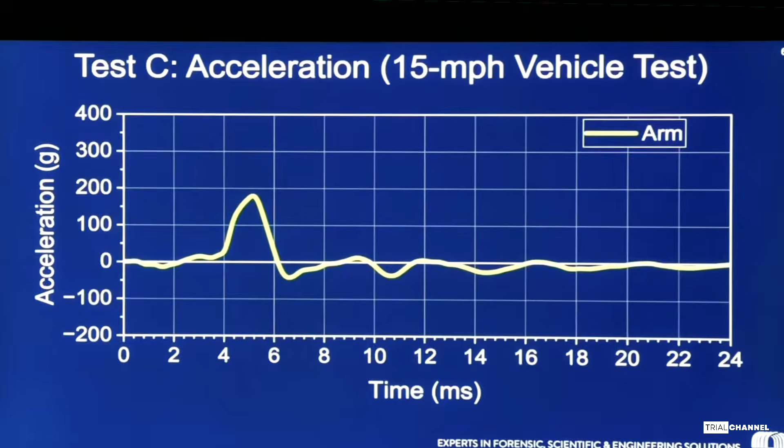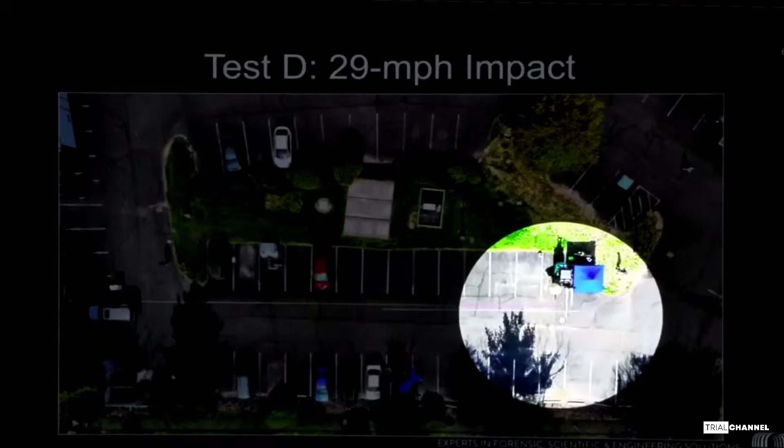Staying with test D, what is this depicting? This is a drone video showing a top-down perspective of the test with the Lexus starting on the left-hand part of the screen, accelerating in reverse into the suspended hybrid arm over here at the location of the forklift. Okay. If we could watch this video, please.

Do your next slides show, there you go, the suspended arm. What are we looking at here? So this is a video camera that was positioned on top of the forklift looking down at the arm, so you'll see the vehicle move from bottom to top as this video plays. By the way, Dr. Wolfe, what are the purple and white lines that we see? I'm sorry, I was talking over that. Sorry. That's okay.

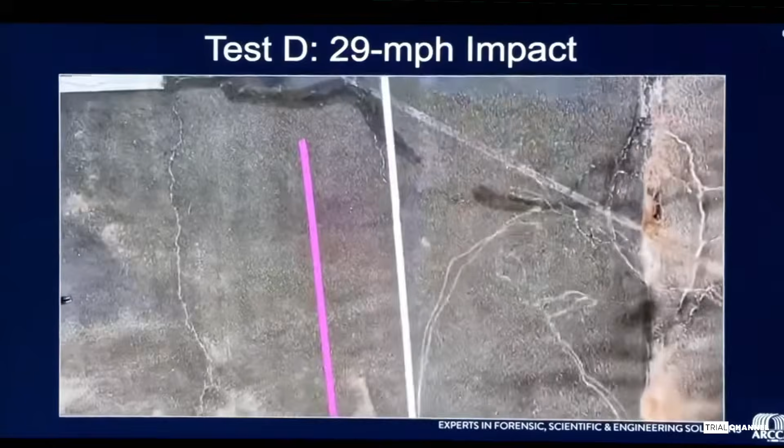What are the purple and white lines that we see? So those are guidelines to help. I will note that this is kind of like a needle in a haystack. It's very hard to hit this small of a target. So it just served as a guideline to reference as we're accelerating rearward into this. Is this in real time? This is in real time, yes. What's the speed that the vehicle is entering the frame at? 29 miles per hour. Thank you. What happened to the arm in terms of its suspension? It actually gets ripped off from the mounting location.

Is there a reason you believe physically that the arm was ripped off from the suspension tethers? Well, certainly there was enough force to break the tie lines to the forklift. Was there a test value of those tie lines? I think they were rated at 150 pounds. What does that suggest in terms of the force exerted on the arms to tear off the tie lines? Well, it indicates that the arm saw at least 150 pounds of force.

What are we looking at in this video? This is going to be a slow motion video. You'll see the Lexus accelerate in reverse, making contact with the arm. Again, this is the 29 mile per hour impact test.

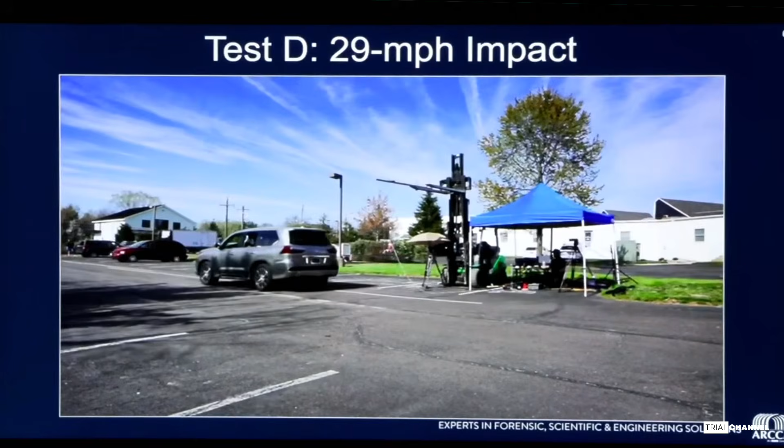What is this? This is a high-speed video, slow motion, of test D at 29 miles per hour into the ATD arm that is suspended. You'll see the Lexus enter the frame from the left and impact the arm.

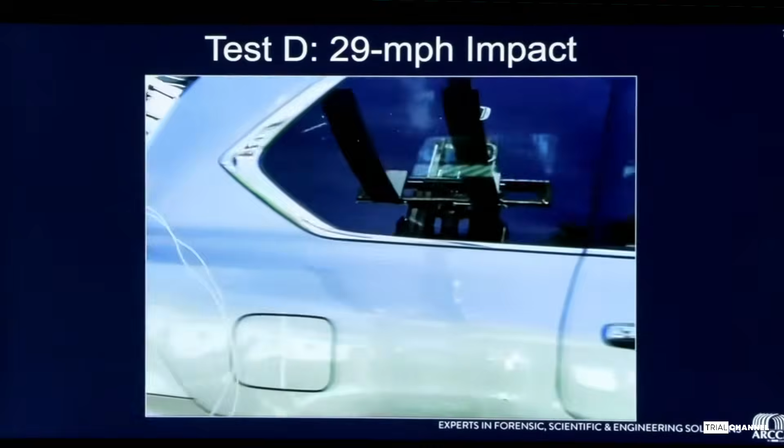Was this strike more reflective of what you were attempting to replicate? Yes, this was a more central impact to the arm, yes.

What is this? This is a high-speed, slow-motion video depicting test D at 29 miles per hour, just a different perspective than the previous video.

Yes, more of a central impact compared to that first test at 15. Is that more or less consistent with what you saw in Dr. Welcher's test, where he had his arm in that still shot associated with the geometry of the car? Sustained. What were you trying to replicate, or why were you trying to replicate this at the 29 mile an hour test in this particular orientation?

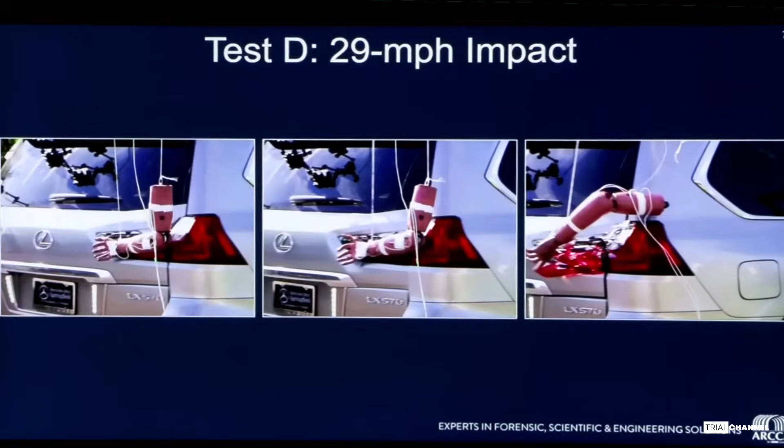We were trying to see, based upon Dr. Welcher's orientation, what happens to the arm in terms of the acceleration and the damage to the taillight at that configuration at contact.

What are we looking at? This is a photograph depicting the damage to the liftgate taillight as well as the quarter panel taillight. On the liftgate taillight, a significant portion of the thick 5 millimeter red outer lens is fractured and broken off. The underlying diffusers are still in place. There was a small crack in, I believe, the upper diffuser. The quarter panel taillight had the clear section damaged with the outer lens missing, along with some fragments from the outer portion of the red part of the lens.

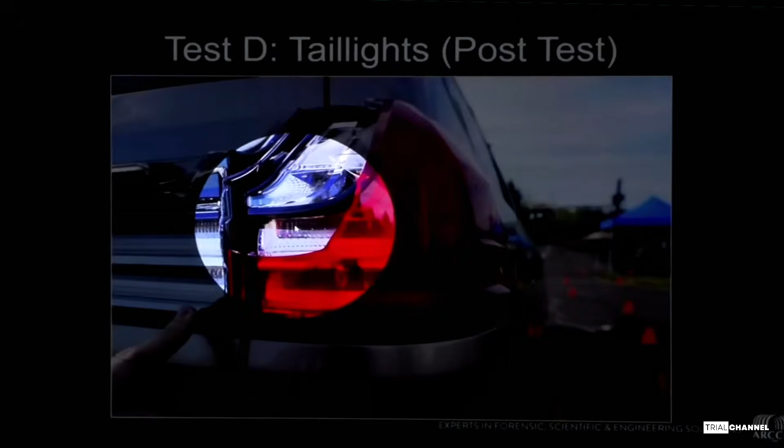What are we looking at in this slide? This is another photograph depicting the quarter panel taillight. As indicated, portions of the red lens cover are missing. The interior diffusers remained largely intact in this test.

What is this side-by-side depicting? This is showing the results of the 29 mile per hour impact test to the test vehicle compared to that of the subject taillight. Given that orientation of test D, were you able to reach any opinions or conclusions as to whether the damage to the subject taillight is consistent with striking an arm at 29 miles per hour? It was inconsistent. What's the basis for that opinion, Dr. Wolfe? The results of this test. And was that testing conducted in accordance with the scientific literature and generally accepted methodologies in the field of accident reconstruction? Yes.

Is the damage to the right rear taillight of the subject vehicle consistent with striking John O'Keefe's arm at 29 miles per hour? Sustained. With regard to your opinion concerning whether the subject taillight is consistent with striking an arm at 29 miles per hour, do you hold that opinion to a reasonable degree of scientific certainty? Yes.

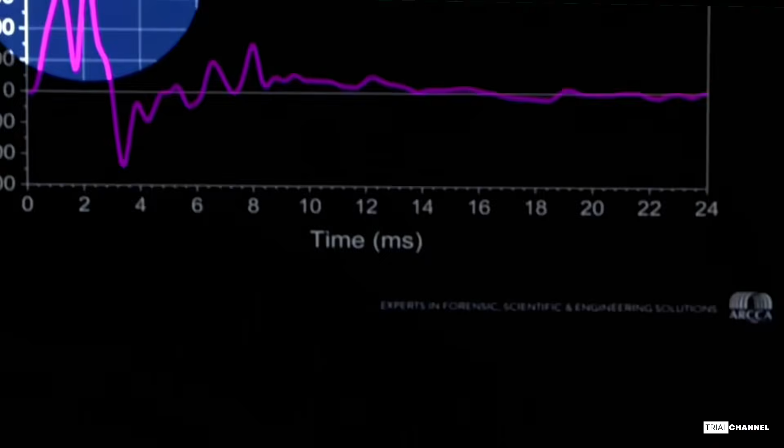What are we looking at in this graph? This is the acceleration of the arm, reaching a peak acceleration of about 500 Gs.

You indicated 800 Gs in the last graph. What's the difference in the delta between the 500 and the 800? Between the hand and the arm? Understood. Which one suffered or was subject to 800 Gs? That would be the hand. And which one was subject to the 500 Gs? That would be the arm.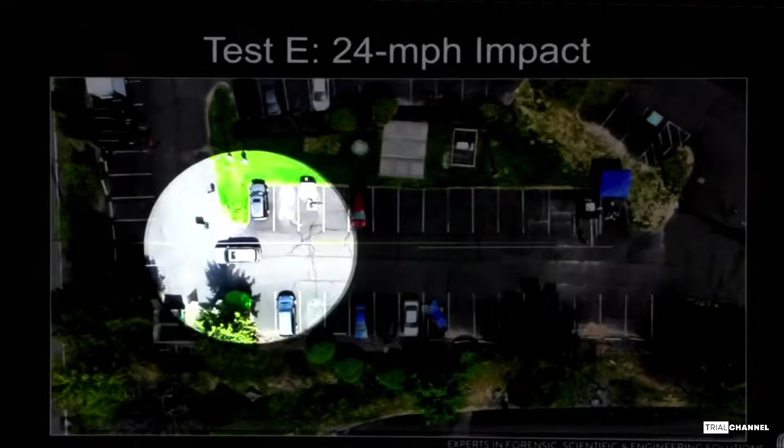Next slide. And what are we looking at? This is a top-down drone video with the Lexus here on the left that will accelerate in reverse up to 24 miles an hour, striking the ATD arm. Let's watch that, please.

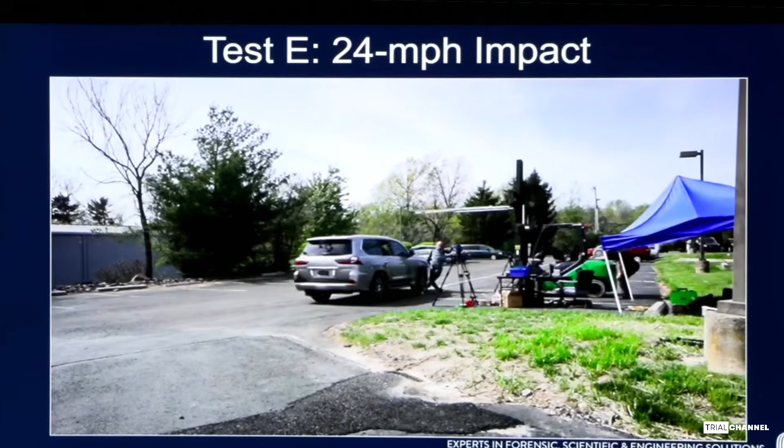And could we go to the next slide, please? And what is this? This is a perspective from the high-speed camera, so a slow-motion video with the Lexus reversing into the ATD arm at 24 miles per hour.

Okay, thank you. If you could play this for us, please.

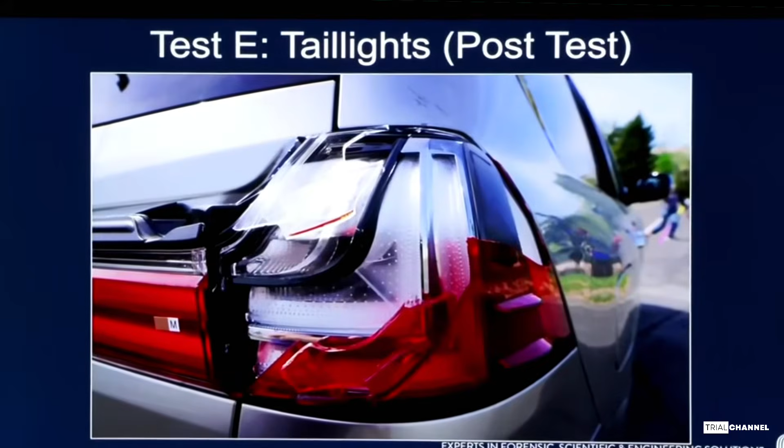What about the chrome piece running between the diffusers? I don't believe that was damaged during this test. What about the clear acrylic toward the top left of that taillight housing? It was partially fractured, but not the entire outer portion of it.

What is this depicting? This is a photograph depicting the quarter panel taillight subsequent to the 24-mile-an-hour impact test with the ATD arm, compared to that of the subject taillight. Based on this test, were you able to reach any opinions and conclusions as to whether the damage to the subject taillight is consistent with striking John O'Keefe's arm at 24 miles an hour?

Sustained in that one. Were you able to reach any opinions or conclusions as to whether the damage to the subject taillight is consistent with striking an arm at 24 miles per hour? Based upon the test results, it's inconsistent with striking an arm. On what do you base that opinion? I base it upon the test results I've shown in terms of the video and the data acquisition.

Can you describe that in more detail? During this test, we had the instrumented hybrid arm outstretched from the test dummy with the accelerometer on the hand and the forearm. We had data acquisition on the vehicle monitoring the speeds of the vehicle. We accelerated that vehicle into the arm at 24 miles an hour to conduct a dynamic impact test to collect data about the acceleration the arm experienced, and also to make observations about the damage we observed to the taillight.

Do you hold that opinion to a reasonable degree of scientific certainty? Yes. And were your tests conducted in accordance with methodologies generally accepted in the field of accident reconstruction for this particular test cycle? Yes.

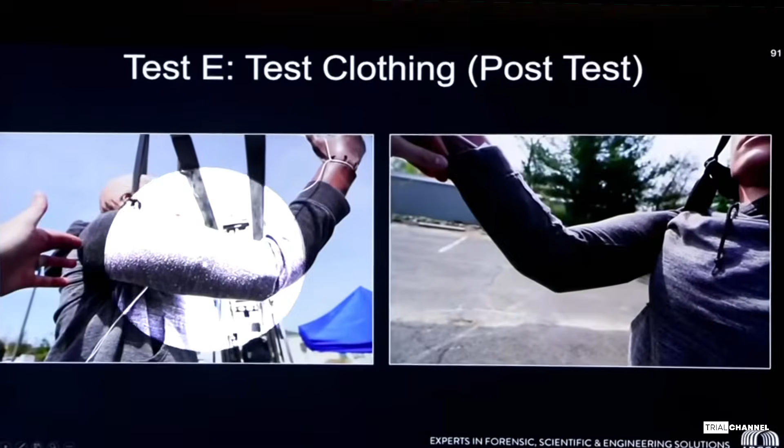What are we looking at in this series of photos? These are photographs depicting the test clothing. Prior to the test, there were no holes or damage to the sweatshirt, and that was the same post-test. We did not see any fraying, holes, or punctures to the material of the sleeve. Was there any damage whatsoever observed on the right sleeve of that ATD? No.

What are we looking at here? This is the acceleration of the arm during this 24-mile-an-hour impact test, reaching peak Gs of about 300 at 4 milliseconds.

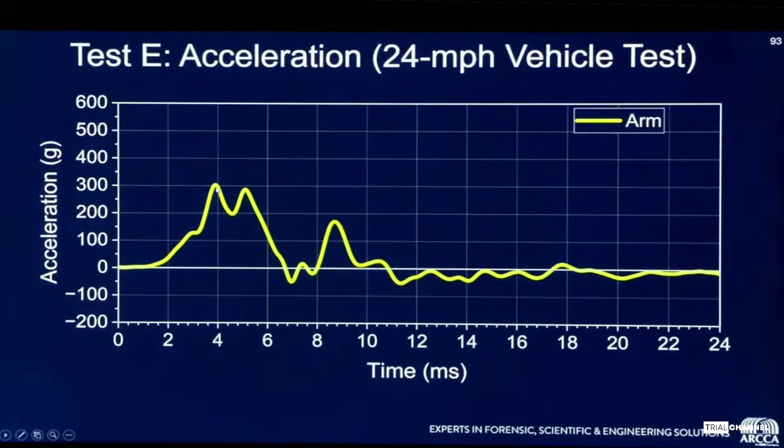When the ATD was oriented in test E as in echo, where it was standing with its right arm out, and the impact was on the right arm, what happened to the mass of the body of the ATD? It rotated. Was it projected at all off to the side? No. Was it projected rearward? No. Was that rotation expected based on your experience? Yes.

What is the 29 mile an hour impact test in test F? This was a test that we conducted with what's known as a rescue Randy, or a test dummy, that was a full-on impact to the right rear corner of the Lexus.

Let's take a look at the next slide please. With regard to test E, if I could please ask you about that - I will go back to that test again, we're looking at this one. With test E, was that reflective of a direct impact on the arm itself? Correct, right in the area of the elbow to the quarter panel taillight. As opposed to a side swipe on the arm? Correct, yes. Thank you.

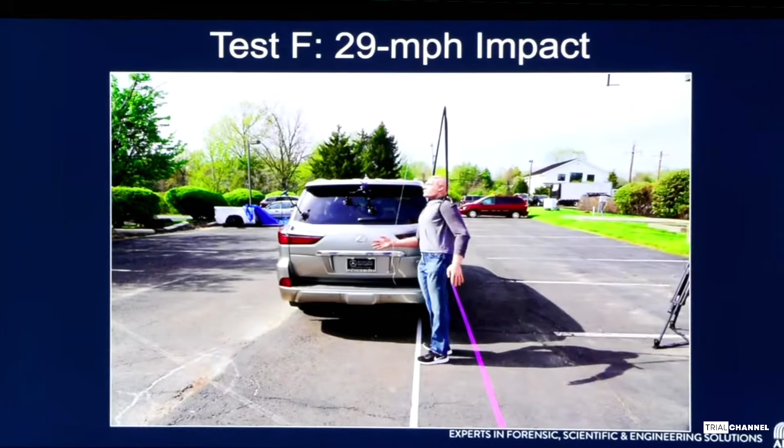Did you undertake to test a direct impact on the body of the ATD in this test, of the rescue Randy dummy? Yes. What are we looking at here? So this is the intended impact configuration with the rescue Randy suspended here by the forklift, in the path of the profile at that right rear corner. How much does this test dummy weigh? Approximately 200 pounds. Next slide please.

What are we looking at in this photograph? So this is a video. We had a little bit of a false start, so our high speeds weren't triggered, but thankfully we were able to pull our surveillance video to get at least an overall video of the test taking place. Did you intend to have high-speed video just like you've had in every other test? Yes. What went wrong? There was just a miscommunication between the driver and the rest of the test engineers. Got it, so false start.

Was the taillight housing reassembled for this test? Yes, it had a preconditioned new set of taillights on it. Other than the taillight being damaged several times that we've seen, was there any other damage to the rear of that exemplar vehicle? Other than the taillight damage that you rotated through in your testing, C through F, was there any other inherent damage to the lift gate that existed when the exemplar vehicle was received by you? When it was received, no, it was in good condition. No defects or damage were noted.

What are we going to expect to see in this video? In this surveillance video, the Lexus will come from the right to left, strike the Rescue Randy, and then you'll see the Rescue Randy projected and slide on the ground. Can you play that one more time please?

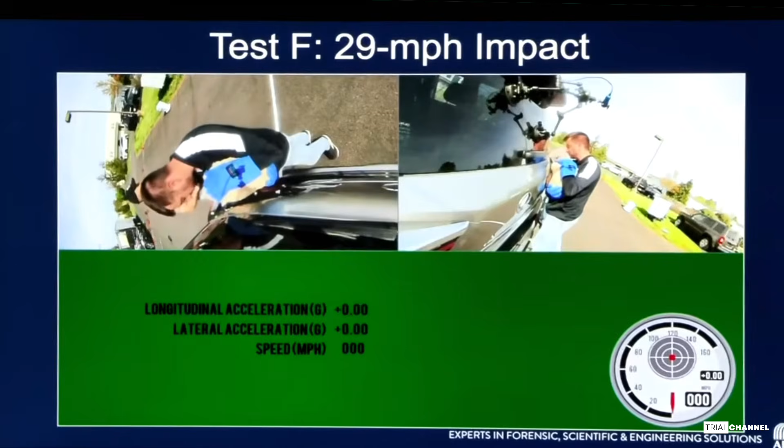That was my question - the blue, that's dry ice? Gloves - you don't want to touch dry ice with your bare hands. So he's wearing gloves. He's capturing the thermal images now.

Next slide, please. And what are we looking at in this? So these are extracted frames from that video you just saw from the data acquisition system. On the left here is just before contact between the test dummy and the Lexus. On the right is just at contact.

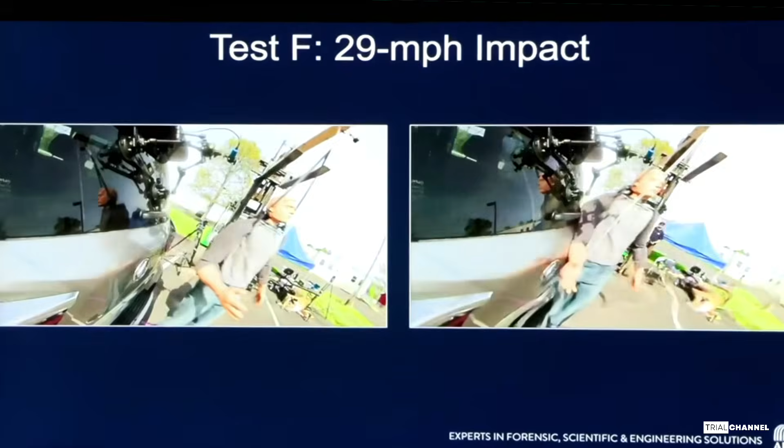Next slide, please. And what are we seeing in these series of photos? So this is obviously during the collision sequence. The body now has loaded into the lift gate and the back window. What you're seeing here is the back window shattering. And this is just a split second later in time where, again, the body is continuing to move with the vehicle as it's contacted.

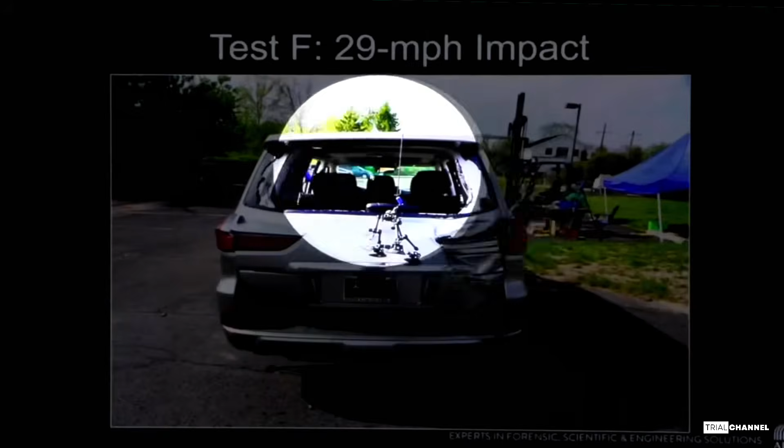Next slide. And what is this? This depicts the post-impact damage to the rear of the Lexus. As I noted, the rear window is completely shattered. There's deformation and crush to the liftgate section of the vehicle. The bumper step was popped out, and then there was some minor fracturing in the bumper cover at the lower level.

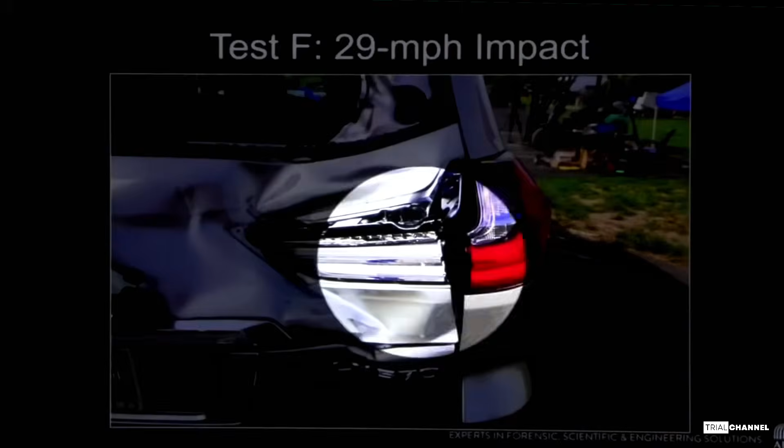Did you note anything regarding the internal components of the exemplar taillight, even at this direct impact? So the taillight, as you can see, it blew out the outer lens cover. I believe part of the clear diffusers were actually still in place. I think the lower one might have been fractured here, but I think the upper one was still in place.

At 29 miles an hour with a direct impact, did the exemplar taillight exhibit the same type of damage to the diffuser as the subject taillight? I'm not sure I understand your question. More or less damage in this photo to the diffuser specifically than in the subject taillight? Well, I think there was more in the subject taillight. As I mentioned, I believe the top diffuser was intact. Okay, that was my question.

And is there another slide at the back end of this one? That's it. Okay, we can have the lights.

Dr. Wolfe, you conducted tests at what miles per hour? Tell me the sequence. It would be 10 miles per hour, 17 miles per hour, 15 miles per hour, 29 miles per hour, 24 miles per hour, and then a full-on hit at 29 miles per hour.

Regarding all of the tests you conducted, what did you observe with regard to the damage, if any, to the internal components of the quarter panel taillight? And I'm talking about the chrome pieces and the diffusers. It was less in all of the tested taillights than that of the subject taillight.